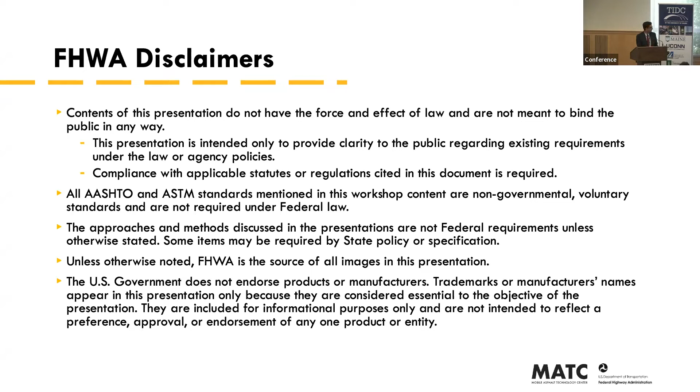So today I'm just going to talk about the recent technologies that are being used by agencies to enhance quality control in asphalt paving. The usual FHWA disclaimer that I need to show, that we do not endorse any products or manufacturers, and any methods and practices that I am going to discuss is not a federal mandate. A list of acronyms that I'll be describing anyways in detail.

So I'm going to talk a little bit about our mobile asphalt technology program for a brief period, and then I'll just explain what we do. So in a nutshell, our program's goal is to take innovative research products and introduce these research products to state agencies and industry partners throughout the country. And so we are basically bridging the gap between research and implementation.

So what makes us unique is that we collaborate with several state agencies and industries to introduce new innovative technologies that are either coming from national academic research or state DOT research efforts. And we field evaluate them on an active construction project. So we evaluate them in real time and real world conditions.

So we actually accelerate the implementation and deployment by providing technical guidance, training, and through our equipment loan programs. So basically, we offer equipment loans so that the state agencies can actually try these equipments out and see if it fits their needs, and then actually invest in these new technologies.

So MATC focuses on 3 key areas. Those are deployment, troubleshooting, and post-construction evaluation. So in terms of deployment, we offer a 2-day quality in asphalt paving workshop. So what we do in this workshop is we cover methods, practices, and potential benefits of a quality-focused asphalt paving to increase the durability of asphalt pavements.

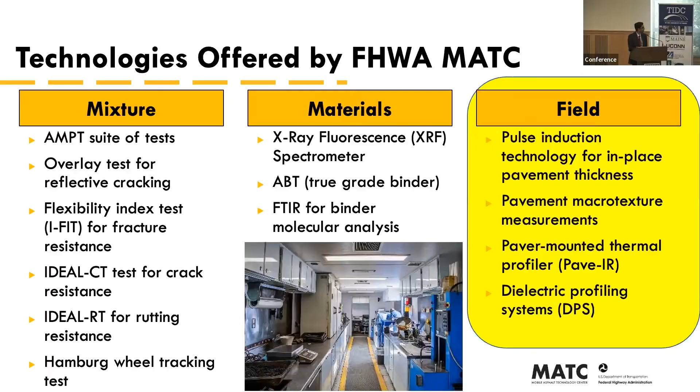So the first technology that I'm going to talk about is pulse induction. This device is a non-destructive tool, and it is used to find the in-situ thickness of both asphalt and concrete pavements. It has been predominantly used in concrete, but now we are trying to deploy it and encourage state DOTs to use it on asphalt concrete as well. This device quickly measures the asphalt pavement thickness, and you don't need to take cores. It eliminates the need for taking cores.

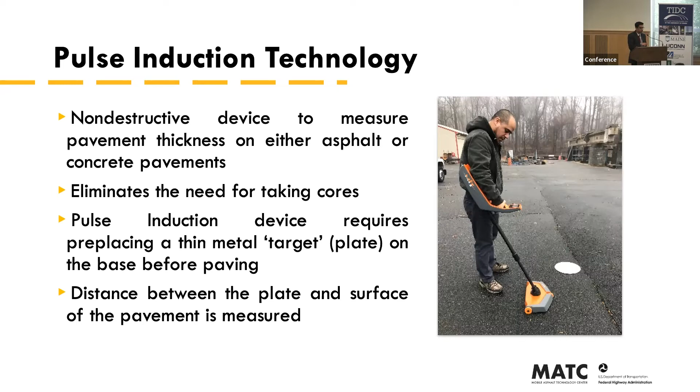In terms of the metal plates, the size of the metal plates depends on your target design thickness. A typical in-place lift is somewhere between 2 to 4 inches. For a 2 to 4 inch lift, we use a target metal plate that's about 3 inches, or about 7 centimeters. We place them before the tack has been placed, then the tack comes over, and then the construction happens. And then we use this device to detect the metal plate.

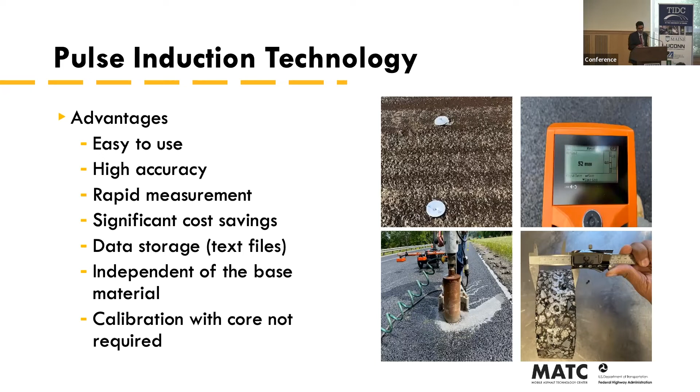In terms of advantages, it has many. It's quick and easy to use, and it's more precise as well, close to a millimeter. It provides significant cost savings in terms of avoiding coring costs. And it is also capable of storing the data.

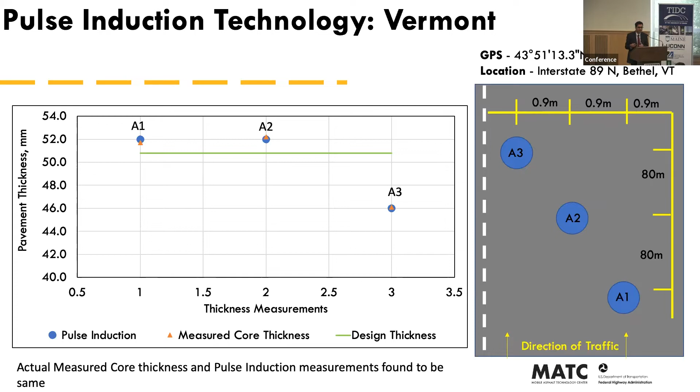Here's a case example from our past site visit project in Vermont. It's an SMA project, and we had pre-placed 3 target plates spaced about 250 feet, or 80 meters, in the longitudinal direction, and about 3 feet apart in the transverse direction, to cover an entire lane width. We compared the pulse induction measurements against the field cores taken right underneath where the measurements were taken, and we found that they were pretty much accurate, close to a millimeter.

Here's another case example from our site visit project in North Dakota. You can see here we didn't place any metal target plates at the center of the lane. The reason is that some states use windrow paving. One of the issues Minnesota had previously experienced is that when using windrow paving, there's a chance the paver could pick up the plates. To avoid that issue, we didn't want to interfere with the paving crew, so we just placed them apart and then took the measurements. And here as well, we found a good correlation, close to a millimeter.

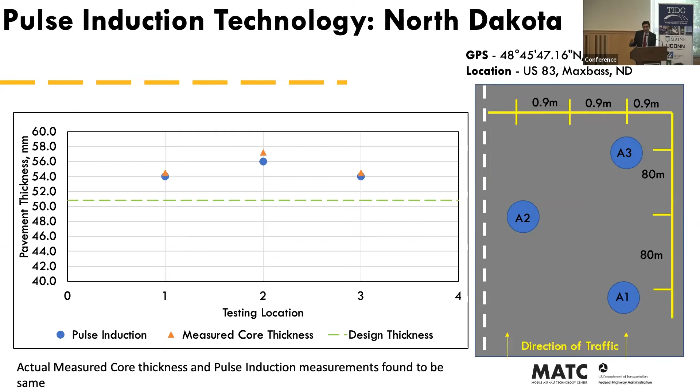This technology also records the GPS geospatial coordinates, so that in the future, if you'd like to go back and trace the thickness, you could do so.

So the next technology that I'm going to talk about is a laser texture scanner that is used to measure the macro texture. So what do I mean by macro texture? It's a term that's used to quantify pavement surface friction characteristics. The surface characteristics of an asphalt pavement are predominantly influenced by two factors: the micro texture and the macro texture.

Micro texture refers to the roughness of an individual aggregate surface, whereas macro texture refers to the void spaces between the aggregates, as you can see over here. So the macro texture, as I mentioned, is a void space that helps in evacuating the surface moisture. And as of now, there's no perfect test to measure texture at highway speeds.

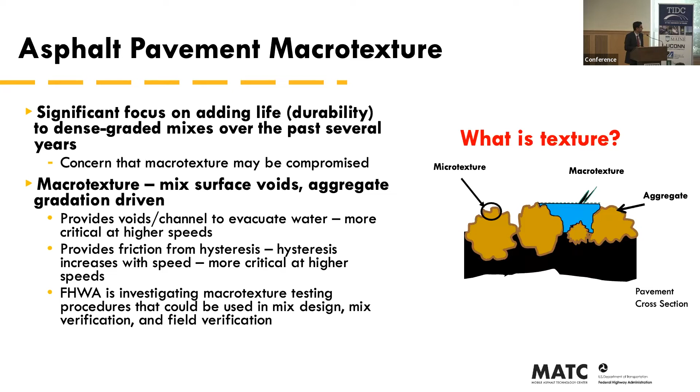So FHWA is currently investigating macro texture testing procedures that can be used in mix design, mix verification, and field verification. One of the methods being used to measure macro texture is this laser texture scanner. This device is lightweight, portable, and it rapidly takes a scan of the surface in under 90 seconds.

This device uses a 4-inch or 100 mm laser line scanner that travels across 100 millimeters or 4 inches to get a 4x4 square area. Because of this smaller footprint, it can be used on laboratory compacted gyratory specimens as well as on field cores.

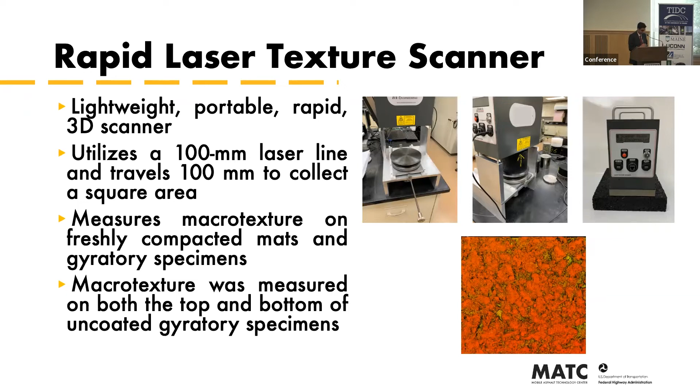So here's an example from the same project. We conducted the test and compared it to the sand patch test, which is a standard test implemented by most state agencies. What we found is there's a good correlation between the sand patch test and the rapid laser texture scanner. And these values are typical as per the 2008 AASHTO guide for pavement friction.

The AASHTO guide for pavement friction specifies that for an SMA or an open graded friction course, the typical values are somewhere above 1. A lower macro texture reading would mean that the pavement is more prone to skidding, and a higher macro texture depth would mean that it has better texture.

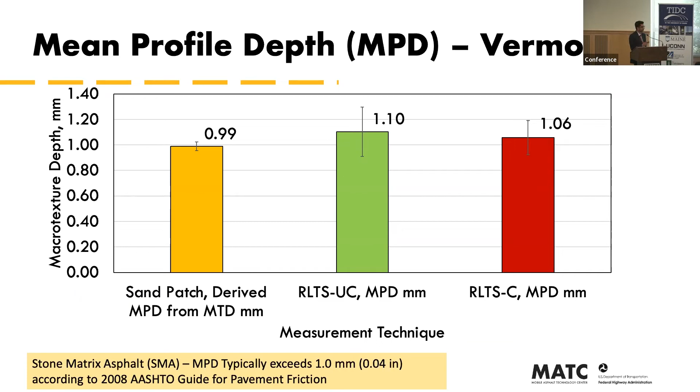Here's another example from our site visit project in North Dakota. Except here, you don't find a good correlation between the sand patch and the laser texture scanner. But these values are typical as per the AASHTO 2008 guide for pavement friction. The only exception is that some states like North Dakota and Washington have a practice of post-fogging their new pavements. They feel that post-fogging the new pavements would increase the service life of asphalt pavements.

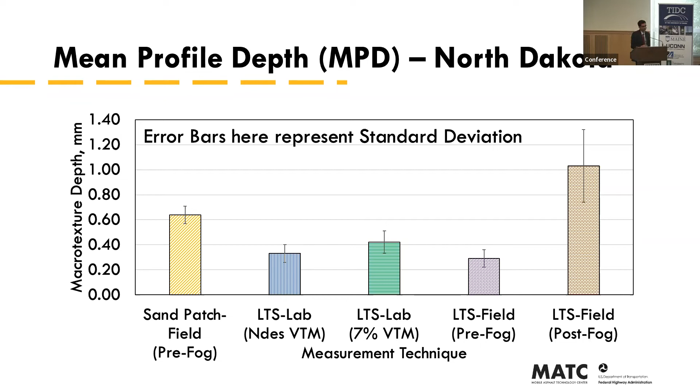But with any laser measurements, this post-fogging would make the surface too reflective. If it's too reflective, the laser texture scanner won't be able to get good readings. So that's where you see a spike in the macro texture reading over here, which shows that the texture is too good. But efforts are still being made to see what can be done in case of post-fogging and how to evaluate them to get good readings.

So the next technology that I'm going to talk about is a paver-mounted thermal profiler. This device is a high precision real-time thermal profiler that is used to detect mat defects before compaction. It provides two-dimensional heat maps, as you can see over here, and it is mounted on a paver about 2 to 3 meters behind the screed.

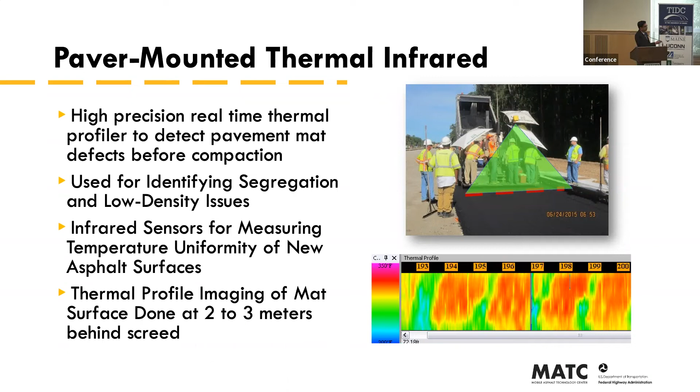The device is pretty simple. It has an IR scanner mounted on a mast that is bolted down to the paver, and it has a DMI, or distance measuring instrument, to record the paver speed, as well as a screen to view these heat maps.

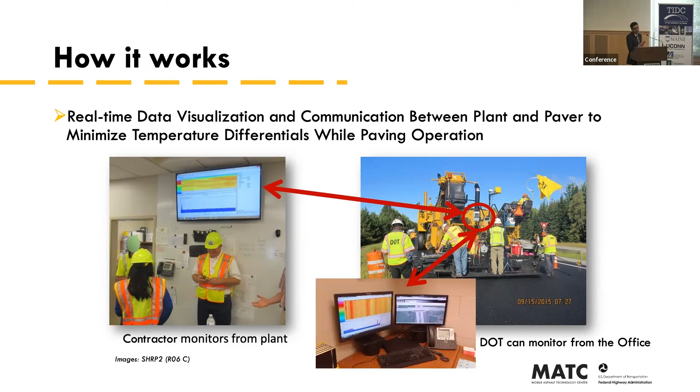In addition to the data being collected, this technology also offers cloud services. This data can be viewed in real time by both the contractors at the plant and the DOT personnel at the office. By viewing this data in real time, it increases the efficiency and the communication between the plant and the paver personnel.

So here's the example from the same project in Vermont. This is an SMA project, and Vermont suspected that they may have issues with thermal segregation, the reason being that the haul distance for this SMA mix was more than 2 hours. They suspected there would be a potential drop in the temperature. But as you can see from these heat maps, we didn't find much thermal segregation.

Overall, the paving was consistent, and they were using a flow boy truck to deliver the mixes, and it was capable of retaining the temperature for more than 2 hours.

And as you can see, there may be some lower density spots, like over here, the blue spots. These blue spots represent a lower temperature, caused either by paver stops or lower paver speeds. And the streaks of gray lines that you see over here are the paver personnel walking in front of the sensor. So you need to train the paver personnel as well, to make sure that they don't interfere with the sensor readings.

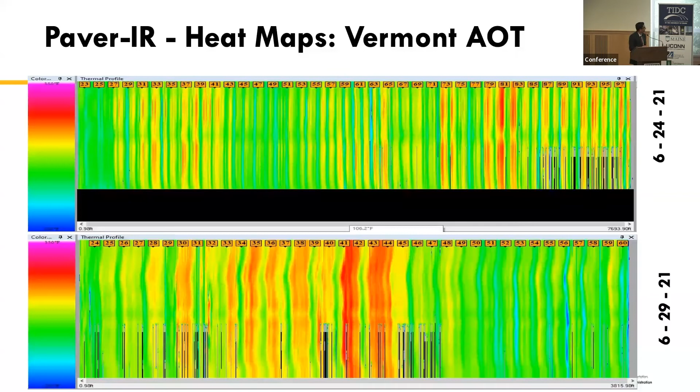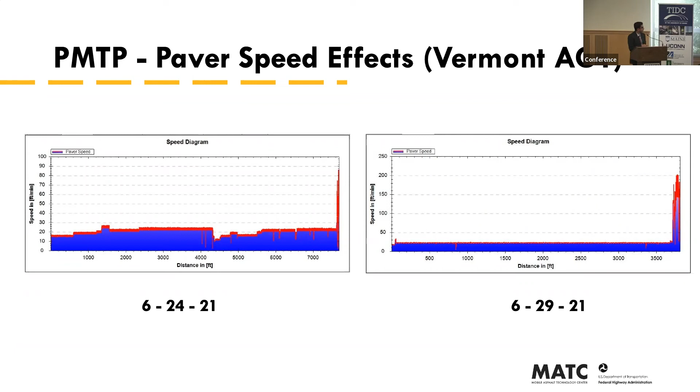And as I said, it also has a DMI, distance measuring instrument, so it records the paver speed as well. We checked the paver speeds on two different production days, and we found that overall they were consistent.

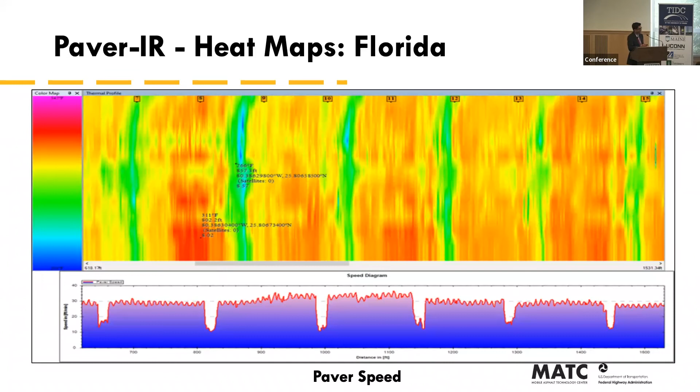So you see over here, there's a significant drop in the temperature. These blue spots that occur every 150 feet are potential areas of low density, and these may cause issues that arise in the future. Here's another example showing the paver stops. As the paver stops, you would see a drop in the temperature as well.

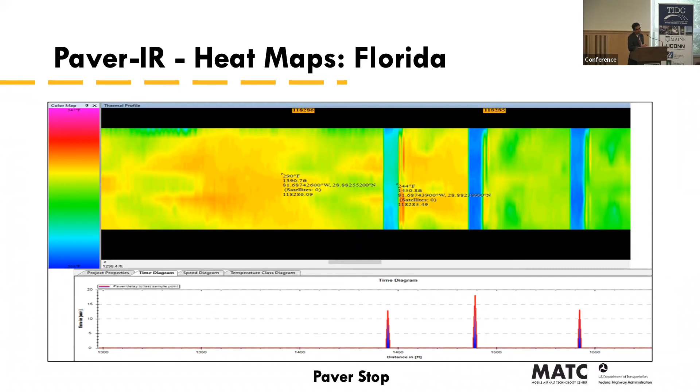And the last technology that I'm going to talk about is the dielectric profiling system. As Professor Ishan already covered it, I'm not going to talk more on the technical aspect, just briefly. This dielectric profiling system provides continuous assessment of compaction quality. It actually continuously measures the dielectric values, not the density. These dielectric values are then correlated to density through calibration curves, etc.

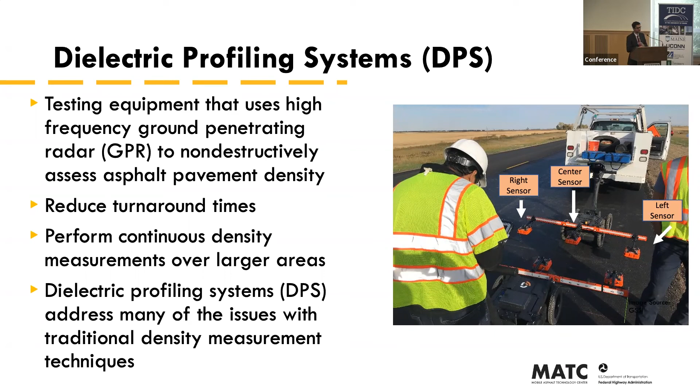The device that I'm showing over here is similar to a push cart, and it has three sensors that can be rearranged in any fashion. About two passes of this dielectric profiling system would give you full coverage of an entire mat. The advantages are that it reduces the turnaround time and avoids cutting cores. As I said, it measures the dielectrics, which are then correlated to density. So a lower dielectric value would ideally mean a low density, and a higher dielectric value would mean a higher density.

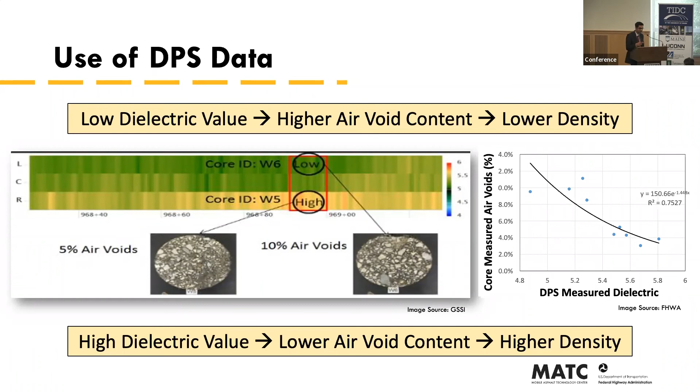The dielectric profiling system comes with a Toughpad, which shows the heat maps for the left sensor, the center sensor, and the right sensor. As you push the cart, you get this data in real time, and you're able to identify potential low density and high density areas just by looking at the dielectric values. These dielectric values are correlated to density by fabricating gyratory specimens and relating that to density.

Here are the heat maps that we generated from the same Vermont project. We did post evaluation on the data, and then some data smoothing. These heat maps provide information on joint density as well, and identify potential low density areas, etc.

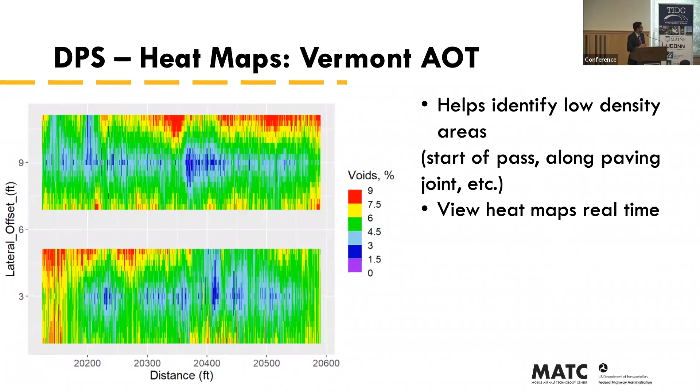We also did some analysis on the North Dakota project using the software called VETA. This is a tool that was developed by Minnesota DOT, and it maps and provides data analysis by integrating intelligent compaction, the thermal profiler, and the dielectric profiling system, all three technologies in one platform. These two figures don't do it justice, but they give you an overall idea of what the software is capable of. It provides histograms, which show a normal distribution pattern, as well as heat maps that can be viewed on a Google Earth image.

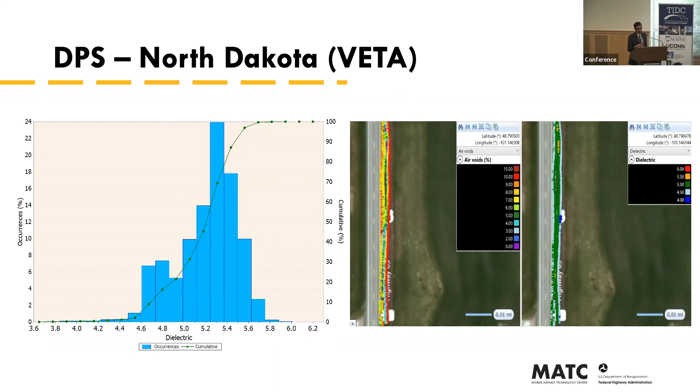This technology is being deployed in many agencies. Minnesota is running with it. Alaska is trying to make a spec on it as well. Several other states are also trying to see the potential benefits of this dielectric profiling system.